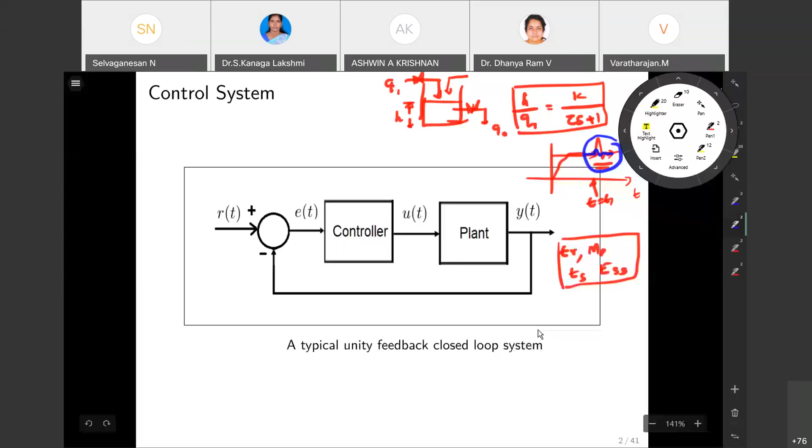Sir, excuse me, sir. Can I interrupt you for a second? Sir, can you please switch on the video? One minute. Okay. I hope you can see my video now, right? Yes, sir, thank you, sir. Okay, thank you. All right.

So the objective of this whole exercise is to design some kind of compensator or controller such that I can meet the desired specifications. My closed loop specifications, as I told you, can be rise time, overshoot, settling time, and steady state error in case of time domain analysis. So finally, after designing the controller, I have to check in simulation whether the required closed loop specifications are met.

Suppose if it doesn't meet the specs, we need to retune the controllers, we need to redesign the controllers, right? Normally, the plant or controller design we do for a given plant is workable for 10 to 15% of uncertainties. Suppose the uncertainties are within this band of 10 to 15%, your closed loop control system will definitely work. Suppose your parameters are varying and it's no longer within the band of 10 to 15%, then maybe you can have other controllers, something like robust control systems, RCS. It is workable for a maximum of maybe 30 to 40% band - I'm talking about uncertainties associated with the plant parameters.

Suppose we say my value of k equal to 1 and tau equal to 2, for example. So the 10 to 15% means plus or minus 10 to 15%. That's what I'm saying. When you talk about robust control system design, it is workable for an uncertainty band of 30 to 40%. Suppose the parameters keep on varying with respect to time t, then definitely your fixed control systems won't work. So we need to have an adaptive control system.

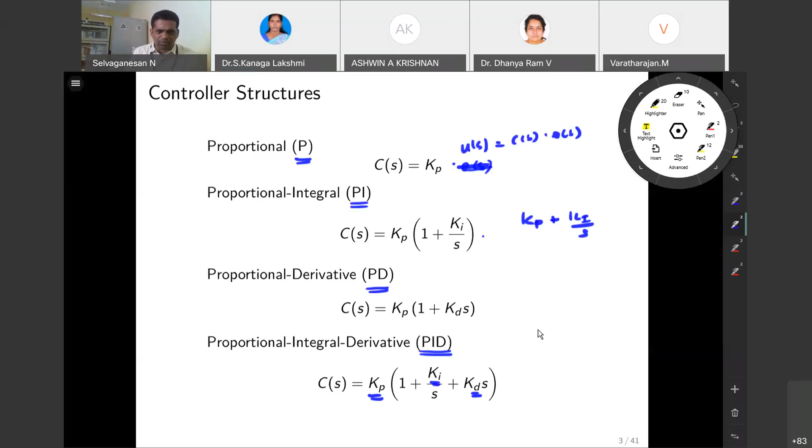So we would like to know first how to select these parameters Kp, Ki, Kd, because we define the structure now for the given control system. We define the structure, but we would like to know how these parameters can be selected. If you look at this table, I have represented it here.

This table shows that with respect to the increasing value of Kp, how different performance indices, time domain performance indices, are affected. As I told you, in case of time domain analysis, we have rise time, overshoot, settling time, steady state error, and we also talk about stability in some cases.

So with respect to the parameter Kp, if you look at this, rise time decreases. So this is decreasing, and overshoot increases because of the decrease in rise time. Normally, as Kp increases, it introduces more overshoot, because a decrease in rise time definitely means overshoot should be more.

But settling time doesn't change much, only a small change may be there, and steady state error is decreasing, but it is not eliminated. Because of the increase in Kp, it actually degrades the stability process. Stability is getting degraded. Now if you look at the parameter Ki, the integral controller...

What happens is, because of Ki, this decreases rise time. So ultimately, like Kp, it increases the overshoot, and settling time increases to a large extent because overshoot increases much. However, the biggest advantage of Ki is that it eliminates the steady state error.

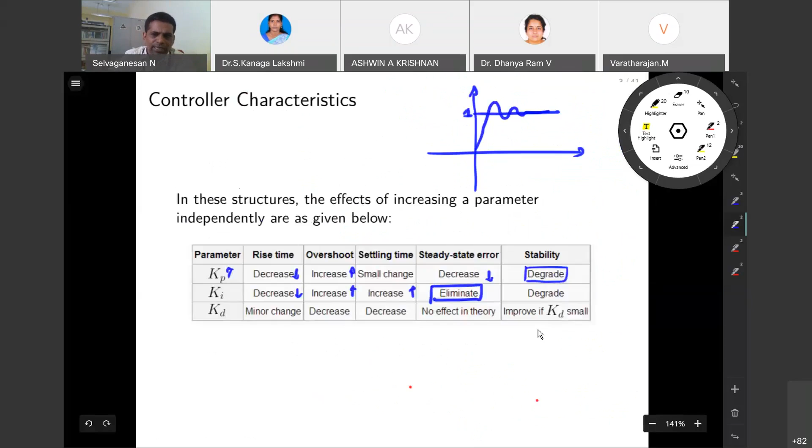This is what I'm saying. If its error is zero, that indicates that your steady state error is eliminated. This is achievable only in case of an integral controller, Ki. But the beauty of Kp is it will reduce the rise time. It will reduce the rise time.

Rise time is reducing, right? Decreasing the rise time, I would like to say. So this is the beauty of that. Ki eliminates this, decreases. Okay, when you look at the Kd, what will happen here?

Kd, there is no much change actually in rise time by introducing Kd, and it will decrease the overshoot. The strength is by decreasing overshoot. What will happen now? Definitely, the settling time will decrease, right? So settling time will decrease, but as far as steady state error is concerned, there is no much effect there. But stability can improve if Kd is very small normally.

That's why if you look at the structure, or if you find that after design, if you look at the parameters of Kp, Kd, normally the numerical value of Kd is very small. That indicates that the stability is improved drastically. So by having an increase in Ki, normally we see more overshoot, and it takes a long time to settle. So these are the characteristics of the controllers which we are talking about.

So now we would like to see how to use that table. I would like to say that the first step is to determine what characteristics need to be improved. That is our first idea, first step. And once it is done, suppose if you say that my open system is working fine, there is no problem at all, right? So we don't go with any control system designs.

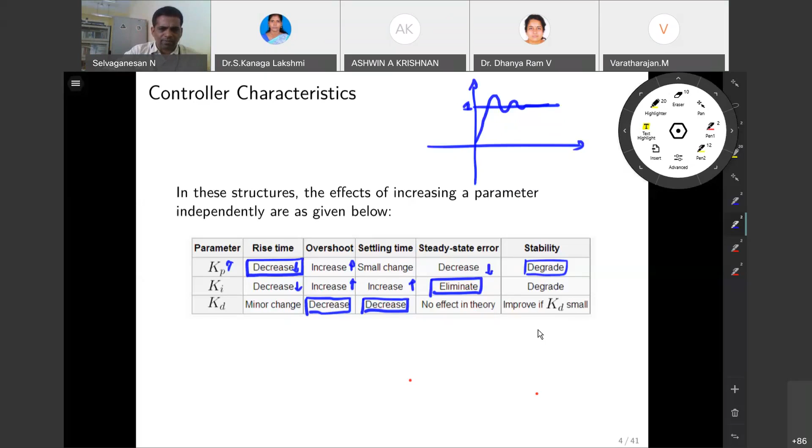So here in this case, we talk about 3 parameter controllers, 3 degree of freedom controllers. One is Kp, Ki, Kd. As I discussed already, Kp decreases the rise time, Ki eliminates the steady state error, and Kd decreases the overshoot and the settling time here. So I hope you can understand the characteristics of the controller parameters with the table.

So as this presentation is concerned, we are talking about 2 different types of design. One is time domain design, and the second one is frequency domain design. I'm going to showcase some aspects of time domain specifications, time domain designs with respect to the given specifications. So if you look at the process industries, they widely use PID controllers, with the specific requirements.

So if you see what are the different methods which are available or well familiar to you, one is the Ziegler-Nichols method. It's a widely used method because if you look at the literature, there are more than 100 tuning methods available with respect to various classes of plants. These are all modifications of the Ziegler-Nichols method, which was invented during the time of 1942.

So there are other methods too, which can be widely used by the process engineers, like Chien-Hrones-Reswick is another method, and Wang-Juang-Chan. These are the few methods I have listed out for how these methods are used for tuning the controllers in the industrial process industries.

Okay, so here we are not going to talk about all the methods because our time is limited. So I'm just going to use a few methods to explain, to make you understand how the controllers are designed or developed. So the first method we talk about is the Ziegler-Nichols method.

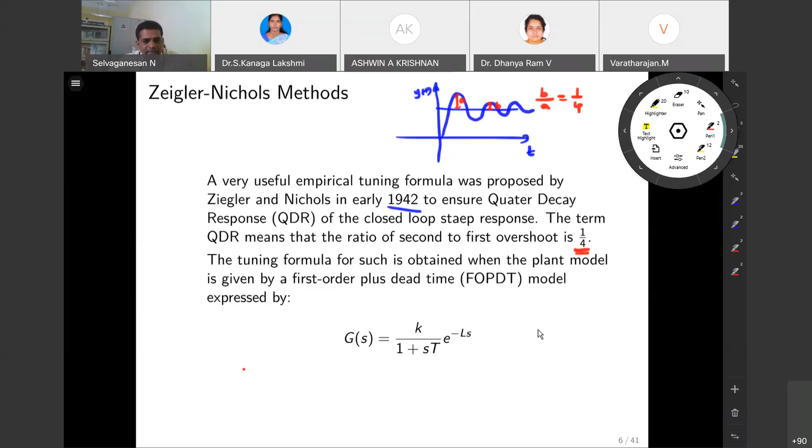So here Ziegler-Nichols is concerned with talking about a first order plant with deadtime. He assumed how a higher order system can be represented with the help of first order dynamics with deadtime. So here k by tau s plus 1, we already have seen this, and he is introducing deadtime, e power minus theta s.

It can be represented in a general sense as k over tau s plus 1 times e power minus theta s, something like that. The parameters here, we use L, which is nothing but theta, and tau is nothing but T here.

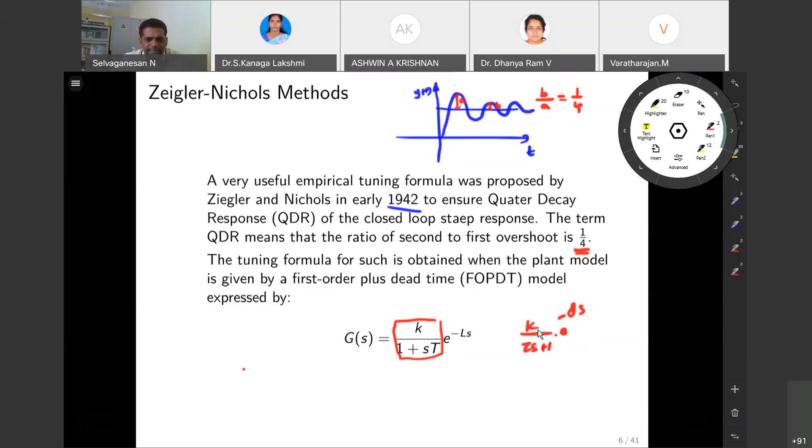Using the Ziegler-Nichols method, we have two methods actually: one is the process reaction curve method, and the second one is the Ziegler-Nichols sustained oscillation method.

In the process reaction curve method, what we do is, given the system, we open the controller and inject a step input, and we get the step output. The controller is open now, we inject the step input and observe the step output, and we would like to see whether the curve is S-shaped. If the curve is S-shaped, then you can apply this reaction curve method.

So here we find the parameters. The first step is to draw the tangent line at the inflection point. So this is my inflection point here, I can draw the tangent line, which cuts the steady state value k, and this point, where it cuts the time scale, is nothing but t, the time constant.

The remaining band is nothing but theta, or as we are saying here, L. So we know the steady state information is k, and the time constant information is t.

And the dead time information we also know from the experimental response, L. Based on this information, one can find the respective parameters. For example, suppose I want to find the parameter using just a P controller. The P controller constant Kp can be obtained by 1 by A, where A is K multiplied by L divided by T. These informations are available from the experimental example.

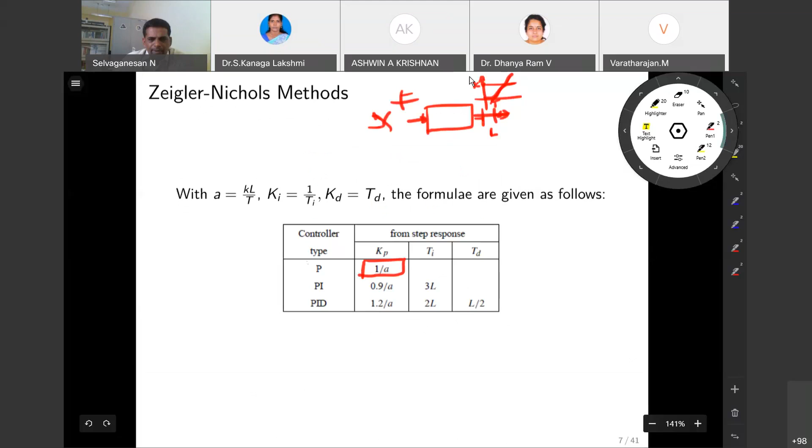So what they did, suppose in case of P controller, this is my P controller here. My P controller is computed based on 1 by A, where A is K L by T. Using this formula, I can find my P, so this is my proportional controller Kp. Like that, in case of PI controller, I can find Kp and this is Ki. I can find those parameters based on the formula which is given.

So it is something like a lookup table. By conducting the experiment, you observe those parameters, and based on them, one can find what the controller parameters are, based on the structures which we selected. There are 3 structures defined here: one is P structure, then PI and PID.

On the other hand, you have the Ziegler-Nichols sustained method, the sustained method of oscillation. Normally what we do now, I have a closed-loop system, and I keep the controller gain. Maybe I have a plant here, my plant is given, and my controller is here, I'm keeping only gain. With the help of gain, I can adjust it, start the gain, increase the gain, and make the system provide sustained oscillations.

It means by increasing the gain, after some time, what will happen? In case of root locus, suppose there are some poles here, and by increasing the value of K, they move towards the right hand side of the plane. I'm considering the case where the poles are moving to the right hand side of this plane for a certain value of gain K. That gain we normally call critical gain, and the frequency we call critical frequency.

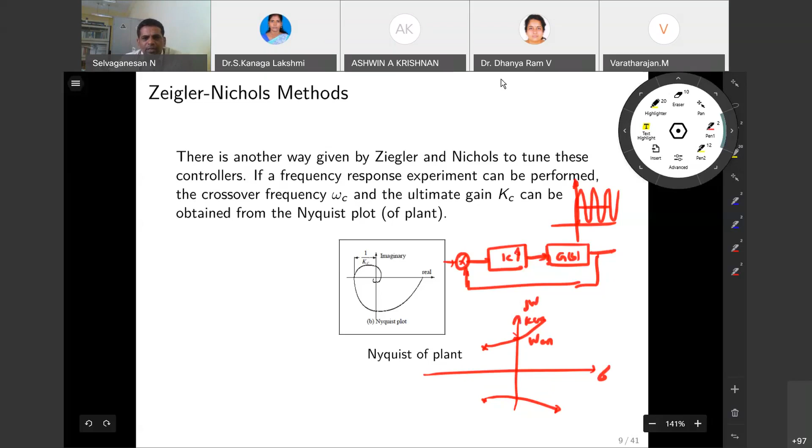So this gain, based on the gain and frequency, one can find the parameters. For example, the critical gain is Kc here, and he has defined a tabular column like what we saw in the previous method, method 1. So I can find 0.5 times Kc becomes Kp, and 0.4 times Kc and 0.8 times Tc becomes the PI controller Kp and Ki parameters. And in case of PID, we define 0.6 times Kc, 0.5 times Tc, and 0.12 times Tc, where Tc is 2 pi by omega c.

So if you know the information of critical gain and the ultimate frequency, one can find the parameters of the controller using this table. So this is also some kind of lookup table only.

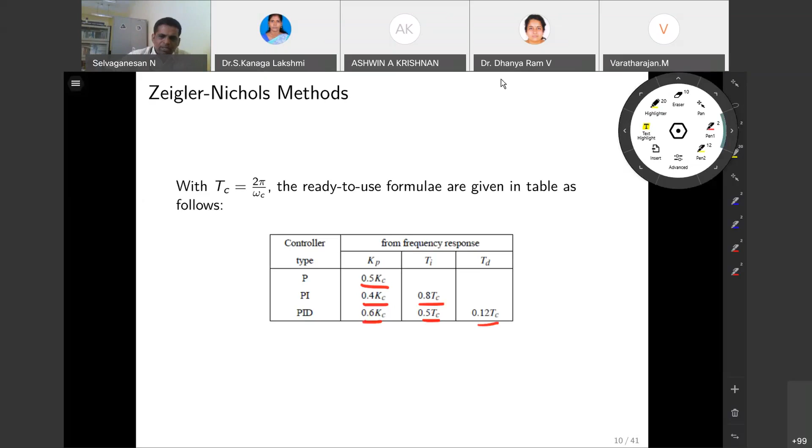But you might ask, does it provide the optimal solution or not? Definitely, some cases may provide it, some cases may not. So we need to do some further tuning. Initial values of those parameters for the given plant can be obtained with the help of this, and later, if you are not satisfied with the given characteristics, one can fine tune with the help of other methods. We are not going for that now, and we are going to explain how these parameters are tuned actually.

Okay, now let us talk about the prospective equations, how to find the value of Kp analytically. So here I'm considering a simple P controller design, assuming we have taken a servo system.

Simple motor control system where the dynamics of the motor can be represented by Km divided by S times tau m S plus 1, where Km is the feedback motor gain and Tm is the mechanical time constant. Here the electrical time constant is neglected. Normally it comes in the form tau E S plus 1 and tau m S plus 1.

This is the motor control, simple armature control speed control of a machine that provides dynamics in this form, Y to V. But this is nothing but theta with respect to the voltage applied to the armature, VA. This is my dynamics. Normally the electrical time constant is very small compared to the mechanical time constant.

Under this condition, the servo system is finally defined as a simple second order dynamics. So we reduce it to Km divided by S times tau m S plus 1. Since the mechanical time constant is large compared to the electrical time constant, we neglect it, so we have only second order dynamics.

Suppose we want to design a controller, for example a P controller, as defined here. I want to design a P controller - how to do that? So here this is my G and this is my GC. What do you do now? I want to find the relation between Y and R.

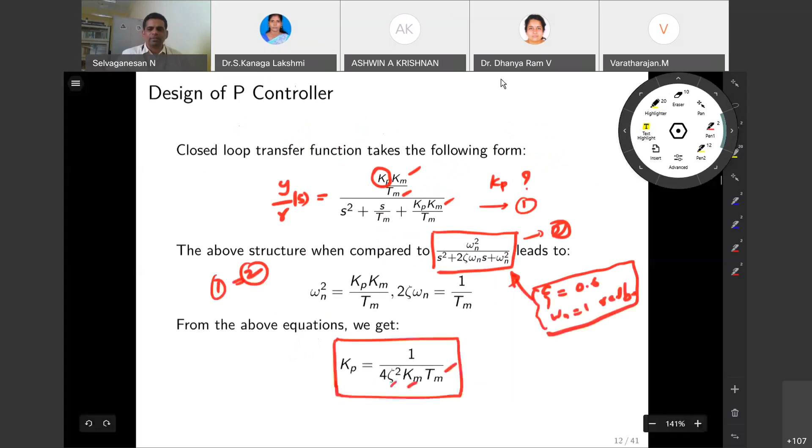So I obtained the value of Kp, which is something like 1.0204. Now I am substituting this in the feedback system, replacing the value with that computed Kp.

Then we applied the simulations. After simulations, this is the course of simulation with respect to the given step input command. The magnitude of the step input is given as 1, a unit step input. So we are looking at how the response is, whether it meets the given specifications or not.

Now the specification is that overshoot is 4.6, as given here. We would like to see after simulation, if you see this overshoot, I've placed that point here. If you look at this now, exactly the overshoot is 4.6, so there is no ambiguity actually.

The point I'm saying is when you look at the analytical models, the specification to be met for the given closed loop is overshoot only. So a one degree of freedom controller is sufficient to maintain the overshoot of 4.6%. After doing the analytical expression, I found the parameter Kp and substituted it in the simulation, and found that it reaches exactly 4.6.

Other parameters are not in our control because we are not adding them as a specification for the design of the Kp controller, since it is basically a single degree of freedom controller. One degree of freedom is only Kp. Two degrees of freedom would be either Kp, Ki or Kp, Kd. Three degrees of freedom control would be Kp, Ki, Kd - three parameters. We are talking about a single parameter controller.

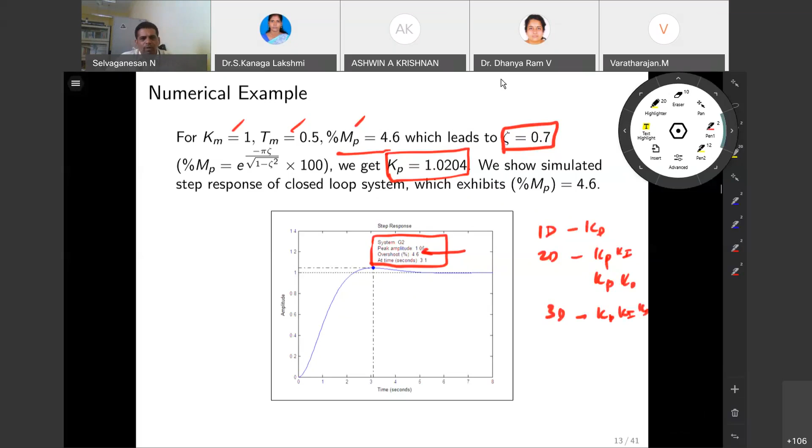A single parameter controller can meet only one solution, because mathematically it's one equation, one unknown. So it provides a unique solution. That's what we observed from the response - that it exactly meets the specification given to the closed loop simulation, which is 4.6% overshoot.

Suppose you want to design other controllers, the same way we can develop them too. I've considered another example to help understand the analytical way of deriving the controller - the PD controller. I'm using the same approach here. The structure is given as PD: Kp times 1 plus Kd times S.

This is considered here, and you derive the closed loop dynamics, that is Y of S to R of S. You find this and equate it with the standard second order equation, so you can find the parameters of Kp and Kd.

So, what is given here - actually, we are talking about...

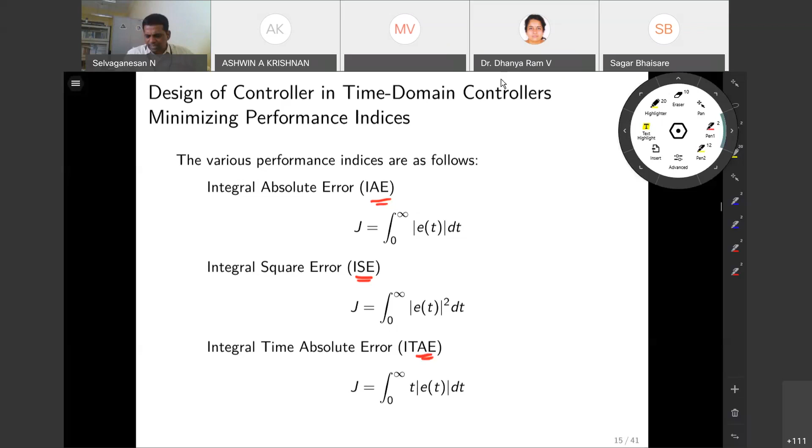These are the performance indices we normally define like this. Now, when to use ISE, IAE, or ITAE - we normally see, if you have a large error, it normally contributes during the transient period only. We normally use ISE, integral square error, rather than IAE, because ISE is significant in case of a large error, but it always provides good accuracy in case of lower errors. So during the transient period, where larger errors occur, we use ISE for the controllers.

That is one aspect of looking at the problem. At the same time, I would like to say ISE actually provides a larger settling time, so that increases the settling time. This is because when you look at the error as time approaches infinity, if the error is minimum, what is the square of that error? Suppose we have an error of 0.1 at steady state, the square of error becomes 0.01, which is less significant compared to integral absolute error. That is why, to get better transient behavior, use ISE, and for better steady state behavior or better steady state profiles, we normally use integral absolute error minimization controllers.

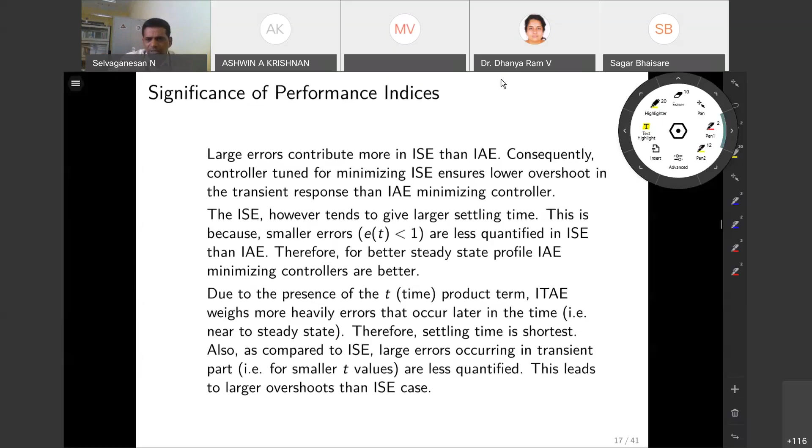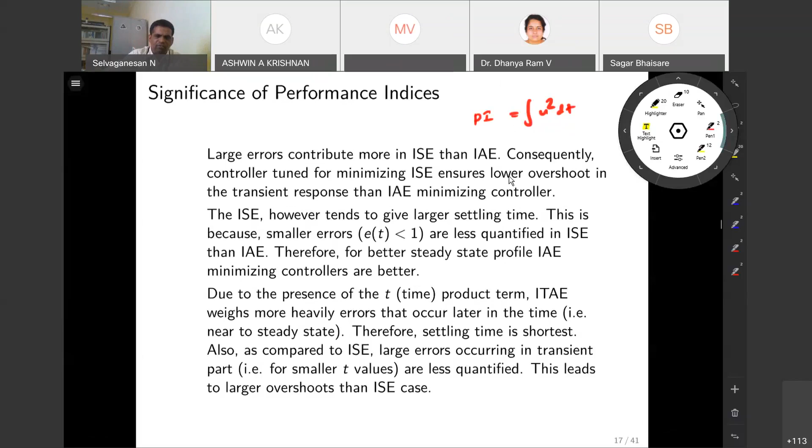But these are the standard performance indexes used by many researchers for tuning controllers using optimization methods.

When you talk about how these controller parameters can be obtained by minimizing this, we need optimization. Normally we use the simplex method, dynamic programming, and many other methods for minimizing such problems. Here I am using a simple function available in MATLAB, that is fmin search.

I have given the code here for fmin search. There are two functions available: one is the function to be minimized, the search we are talking about, and another is fmin con. This is required only for constrained optimization.

Suppose with respect to the given performance index, in addition to it, I need to minimize certain things, so we have certain constraints, which can be equality or inequality constraints on the minimizing function. So with certain equality or inequality constraints, we use fmin con.

But here we are talking about fmin search because it's a very simple unconstrained optimization, since we only need to decrease the error or maybe usability or whatever. We can use this function and run it. This basically works on the model of the Nelder-Mead approach, spelled N-E-L-D-E-R. This algorithm is used for optimization, somewhat like a gradient descent method.

And the third one, with respect to the ITAE, I have obtained the control parameters KP, KI, KD. So I'm using a simple PID structure, and I'm trying to find the parameters KP, KI, KD with respect to different performance indexes. The first performance index is IAE, the second is ISE, and the third is ITAE.

So I have obtained the response with respect to ISE as something like this. If you look at this, it takes a long time to settle. If you look at this problem, it still further takes time, right?

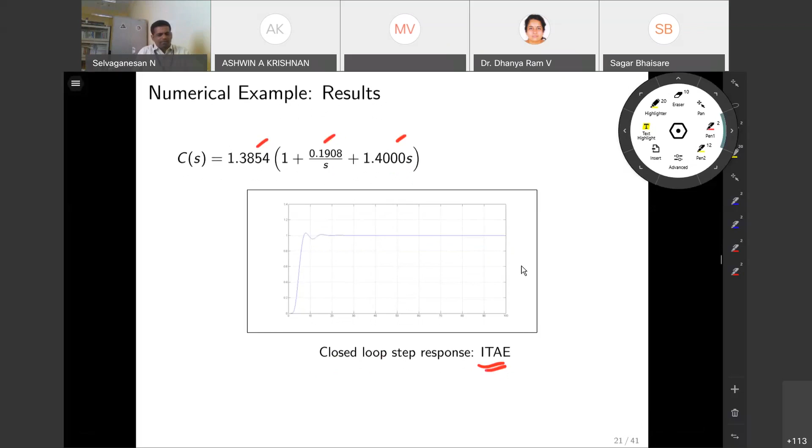So ISE normally introduces more settling time, whereas IAE normally has less settling time. So when you want less settling time with some trade-off, ITAE normally provides a kind of trade-off between the transient behavior and steady-state behavior, and it works very well for controlling the steady-state characteristics.

So this works. You see that it settles very fast, and the overshoot is also very limited. Actually it is even less than 1.1 here. And in case of ITAE, you can see that it is well controlled, to some extent. I would like to say that for this process it works well.

It doesn't mean that it works well for all processes. Suppose I'm using complete certainty, everything is constant, so there are no variations introduced in the plant parameters, and no disturbance conditions are simulated either. Just to showcase you, I have simulated this using MATLAB and am showing you some response for your understanding.

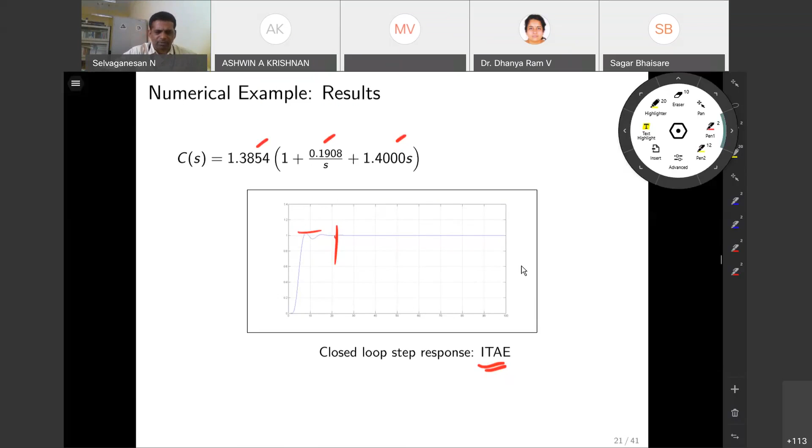You have seen other methods. Other methods are maybe graphical tools, like the root locus method. This is in the S domain, used for the design of controllers, and by placing the controller poles, one can find the root locus such that I can say whether my specifications are met. So this is another graphical tool for design of controllers, but we are not going to discuss it here.

So let us move on to the frequency domain. What we learned so far is time domain analysis and frequency domain analysis. In case of time domain analysis, we talked about analytical expressions and how they can be useful, but only for the design of controllers using those analytical expressions.

If that provides you a unique solution, that is an advantage. At the same time, the disadvantage is we are always trying to equate with the standard second order dynamics to get the parameters. So this is one limitation here.

And in some cases, we say an apple cannot be compared with an orange. Suppose the dynamics of your plant is of fourth order, how can you compare it with second order dynamics? Yes, it can be done only by reducing your final plant dynamics of fourth order to second order, and then comparing it with the defined second order dynamics.

So this is one way we learned, and we also learned some generic methods like the Ziegler-Nichols tuning method 1 and method 2, the reaction curve method, and we also learned the sustained oscillation technique for minimizing this.

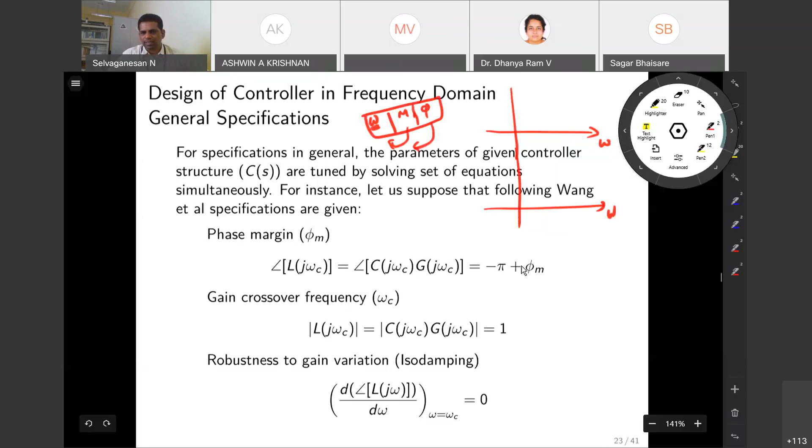So with respect to omega, we give a sinusoidal input and get a sinusoidal output. Under this condition, I can vary the frequency to get the magnitude and phase information at different input frequencies. So I can draw two plots in a Bode plot: magnitude versus frequency, and phase versus frequency. These are two plots, and we call this the Bode plot or Fourier plot.

We can combine these two things with the help of Nyquist also, but we are not talking about that here. We are talking about the simple Bode plot, which contains two plots: the magnitude plot and the phase plot.

From the magnitude plot, suppose the magnitude plot looks something like this. The magnitude crosses the 0 dB line, this is my 0 dB line, and that indicates omega. So this is the gain crossover frequency, that is omega C.

Here is the gain crossover frequency. So I also have a phase plot, something like this. With respect to the gain crossover frequency, I can measure what my phase is. This is nothing but the phase.

So we are talking about frequency domain controlled system design, where the specifications are frequency domain specifications like gain crossover frequency. I have defined gain crossover frequency as where the gain crosses the 0 dB line. That is your gain crossover frequency, and the phase margin is here, this is my phase margin.

These two are known to us because we learned from basic control theory about gain margin, phase margin, gain crossover frequency, and phase crossover frequency. These are the four parameters we learned. For the design here, we are using gain crossover frequency and phase margin. With respect to the gain crossover frequency, we measure the phase margin. So these two will be treated as specifications for the given control system design.

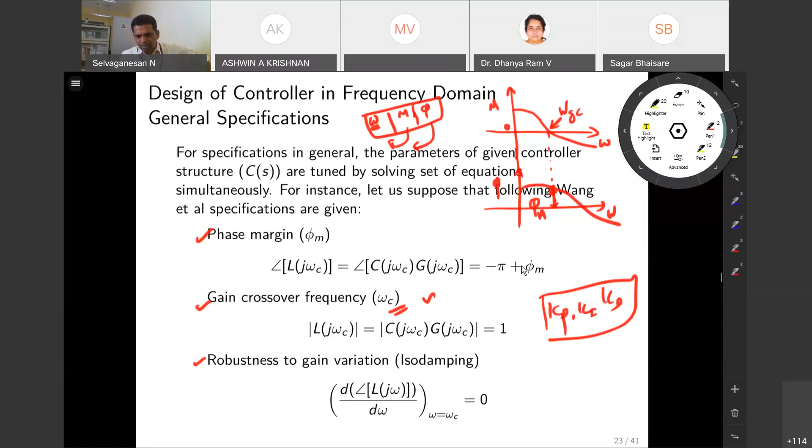Most fractional control designs, which you learned in the previous session about how fractional controllers can be developed or designed, normally use many specifications. This is one of the specifications used for design purposes. We call this iso-damping. What do you mean by that?

So it means, for example, we are talking about the Bode plot here, specifically the phase plot. My phase plot is like this. So what is happening now? We are talking about robustness to gain variation. What do you mean by gain variation?

Suppose for a given k, my omega GC is crossing at this point. Suppose I change the gain k, increasing it. What happens? By increasing gain k, your Bode plot gets shifted up. By decreasing gain k, it gets shifted down. So either it will go up or down, depending on the gain value.

So this is the point I'm saying: increasing or decreasing the gain shifts the magnitude plot, and by shifting this magnitude plot, your gain will change depending on whether you increase or decrease the value of gain k.

Suppose in this plot, by increasing gain k, it shifts here, so my phase margin gets reduced. If you increase it, the phase margin changes, maybe high or sometimes low, depending on the response time. So there is a change in response, there is a change in phase margin.

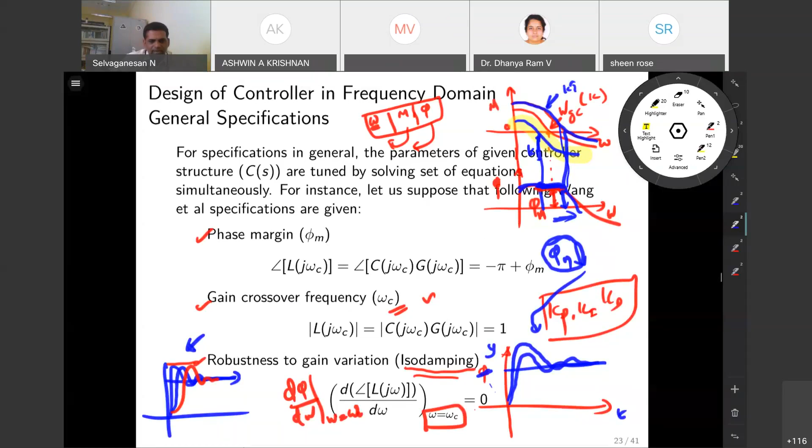So using these parameters, Kp, Ki, Kd, one can find the corresponding controller parameters. Kp as here, Ki, maybe a little complex derived expression, but at the end you get the solution. Kp is here, Ki here, Kd here. So finally it becomes 3 equations for 3 unknowns. What are the 3 unknowns taken? 3 specifications: phase margin, gain crossover frequency, and robustness towards gain variation. These 3 are the specifications considered.

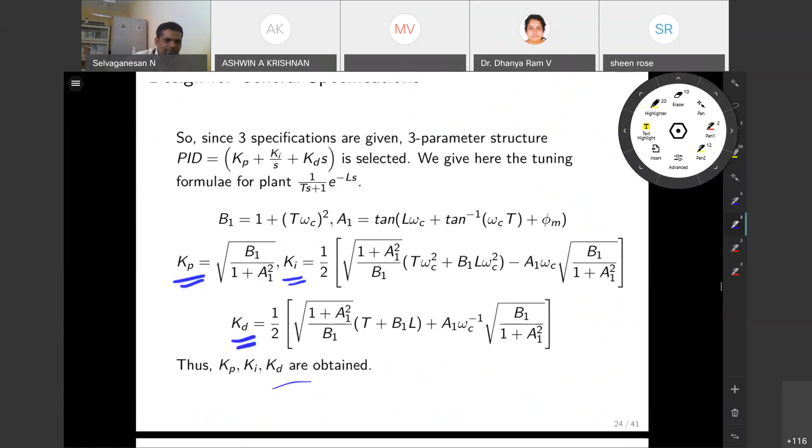Under this condition, we are not using any optimization method here, since the number of specifications and number of parameters available in the controller are equal, 3 numbers. So I am directly solving the expressions analytically and finding the parameters Kp, Ki, Kd. This is the way we normally obtain these parameters.

Let us consider, just to demonstrate, the controller in the frequency domain. We are using T as this, with dead time L as 0.01 seconds, and time constant 0.4. Omega GC is given as 10, and phase margin is 50. This is what my closed loop specifications are, along with d phi by d omega at omega c.

So 3 specifications, 3 unknowns. Using the previous formula for Kp, Ki, Kd with the known parameters, I can find Kp as 2.7425, Ki as 25.7861, and Kd as minus 0.0500.

So by substituting this controller, what will happen? You can draw the model. So I have a G here, I have a GC here, right?

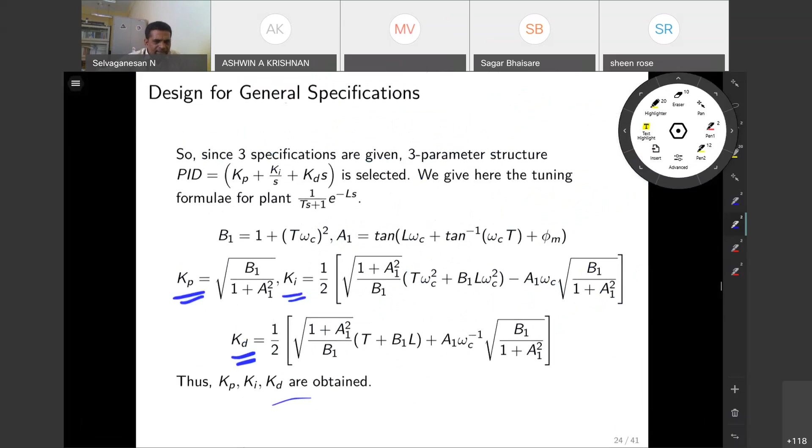Let us quickly see how this control system design is performed. So for what we talked about, we are talking about the controller plant, and we are designing the controller for the given specifications: gain crossover frequency omega c, phase margin, and the isodamping condition. With respect to that, we are seeing whether that closed loop design can meet the same specification or not. So it met.

So we learned that. Now we will go with some general specifications, how the control system design can be developed in the frequency domain with some general specifications. So let's look at this now.

So for example, we are saying one can design a two-parameter controller. Say, for example, I want to design a PD controller to meet the specification, say phase margin, and you can analytically derive the formula for selecting the structure. That is what normally we do. Suppose if you have two specifications, I want to develop a PI controller, I can do it. Suppose I have three specifications, with three different controller parameters like PID, I can meet the specification with an analytical structure.

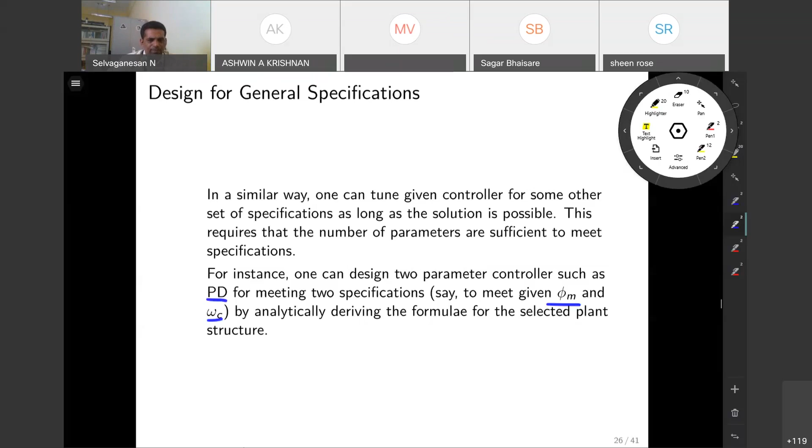Now we'd like to understand how these frequency domain characteristics are getting altered with respect to the given design. Let us first see the proportional controller, and we'd like to see three things: proportional, PI (proportional plus integral), and PD controller.

The first case is a proportional controller. By using a proportional controller, only gain is added. So it is something like K by tau s plus 1. This is the process multiplied with a simple gain. So gain multiplies gain. What will happen now? The magnitude plot either can go up or down.

However, there is no effect on the phase. There are two plots we talk about in the frequency domain: magnitude plot and phase plot. By adding a gain, either it will shift upward or downward in the magnitude response. However, the phase response has no effect, because the phase is independent of the magnitude.

So the ability of the gain is to change the magnitude only, but have no effect on phase, exploiting the design of the controller that is modified. This is the conclusion with respect to a simple P controller. So by adding a P controller.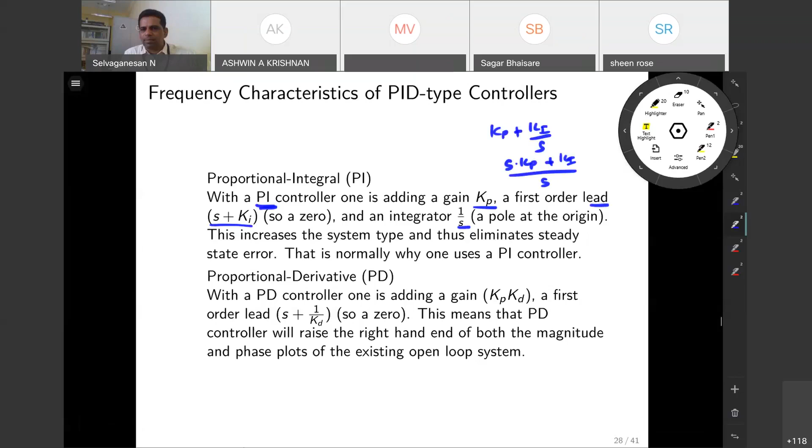By adding a PI controller: this controller indicates KP. So you have a PI controller, and it is adding a gain KP. This is what we are saying. KP is added here. So what is happening? The first order lead, you have S plus KI, so there is a zero and an integrator. It normally looks like KP, simply written as KP plus KI plus something, a parallel structure: KP plus KI divided by S. So S times KP plus KI divided by S. This can be simplified as S plus KI by KP, something like this.

So that is normally why one uses a PI controller. When you want a system that inherently has a steady state error, one can use a PI controller such that you are able to eliminate the steady state error, or you can say the steady state error is zero. This is what we normally do in case of a PI controller.

In case of PD controller, we look at it the same way. PD controller: KP plus KD times S, something like this. So we write some simple formulas: a first order lead, S plus 1 by KD. It is only one zero, there is no pole, only a zero is available. This means you have a PD controller.

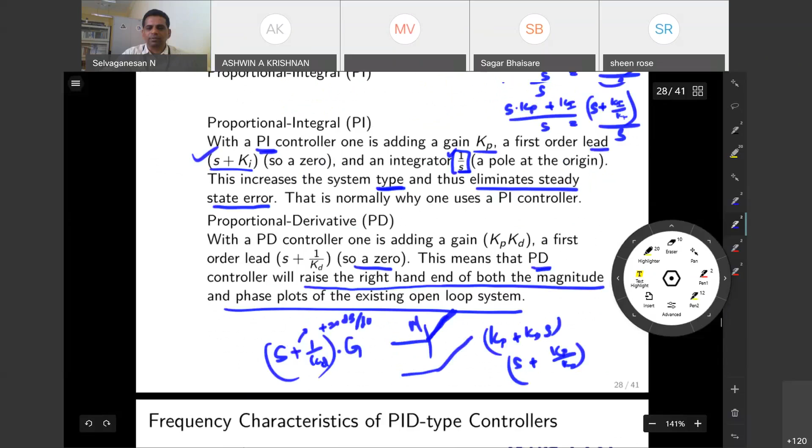So it has what actually, 2 zeros. Like I said, as the previous case, S plus Ki. So I like to say S plus Ki by S, this is the PI. Then S plus... we say the 1 by Kd is given, right? We say 1 by something. So it means I have 2 zeros.

This is my first zero and this is my second zero, and I have one pole which is attached, that is integrator, right? That is what we are defining. Suppose if you look at this, if zeros are real, the controller is actually a combination of PI and PD. Whatever we learn here, this structure multiplied with this is nothing but a simple PID controller. When we talk about the zeros are real.

Okay, so what will happen now? The pole at the origin, what will happen? It will increase the type by 1 and hence it eliminates the steady state error. That is what it does actually in PID controller.

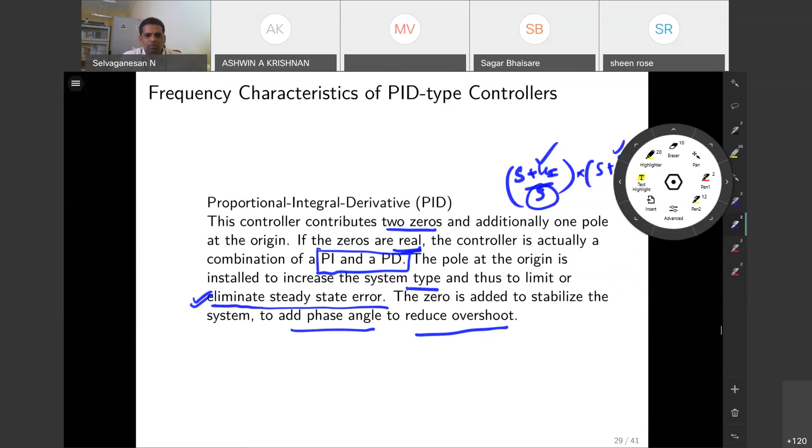And second point is the zero is added to stabilize the system, right? The 2 zeros are here, it stabilizes the system, and also adds phase angle to reduce the overshoot. This is the basic characteristic when we talk about PID controller in frequency domain. So that's the reason how overshoot and things are controlled, because of adding a phase, it reduces the overshoot.

Let us see graphically how this is enhanced.

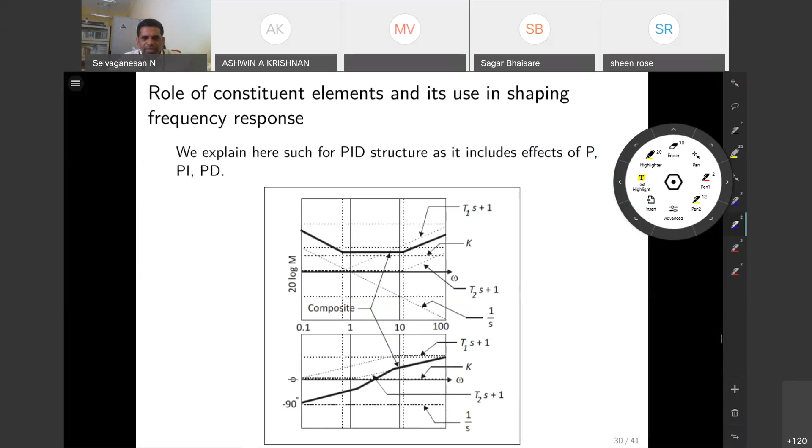So I would like to say here you have a K, right? I'm writing it tau 1 s plus 1, tau 2 s plus 1 divided by, I'm writing in general form. This diagram is I have taken from the Massachusetts Institute of Technology courseware. So K times tau 1 s plus 1, tau 2 s plus 1. This structure is coming from PID structure, so this is the combination.

This is coming from PI, and this is coming from PD. And the combination I'm writing as K times tau 1 s plus 1, tau 2 s plus 1, by S. There are 2 zeros and 1 pole which is at the origin. Now we are going to plot the magnitude and phase actually.

So you just take first K, you can draw some line here, right? This is my K here. So second one is what actually? This is my dotted line, I'm talking about this dotted line, right? That is nothing but K, some K I can be able to draw this.

And second one is I'm plotting the integrator. What is the integrator? Integrator is minus 20 dB per decade. So I have drawn that minus 20 dB per decade line.

And third one is tau 1 s plus 1. So till the first tau 1 s plus 1, till this point, this is my tau 1 here, right? This is my tau 1, first corner frequency. This is zero, so it takes up. So I like to draw here, it comes here, after tau 1 it takes up, plus 20 dB per decade. Hope we can follow it.

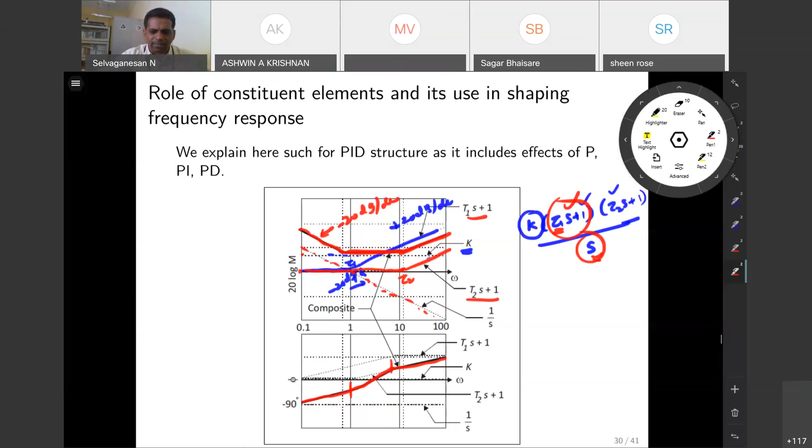So far, you've always learned about the plant and how the plant characteristics can be seen from the Bode plot, magnitude and phase plot, step response, followed by stability analysis, etc. But here I have taught you how the PID controller itself can be seen and its characteristics understood in the frequency domain. So this is what I expressed here, please go through that.

Whatever I explained, it is there. Okay, I will go to the example now, just 5 minutes to complete it. We will take an example of simple plant dynamics: 1 by s times s plus 4 times s plus 6. It is desired to design a controller.

This is the problem statement I had given, such that the closed loop dynamics should meet peak overshoot less than 10%, and settling time less than 1.2 seconds. So we need to use our SISO tool keeping in mind the properties of the PID control structure.

But what I need now is to achieve the required overshoot and settling time. So I need to run a time domain simulation, since whatever I get in the frequency domain here, I need to verify in time domain, to check whether I can meet the given specification on overshoot.

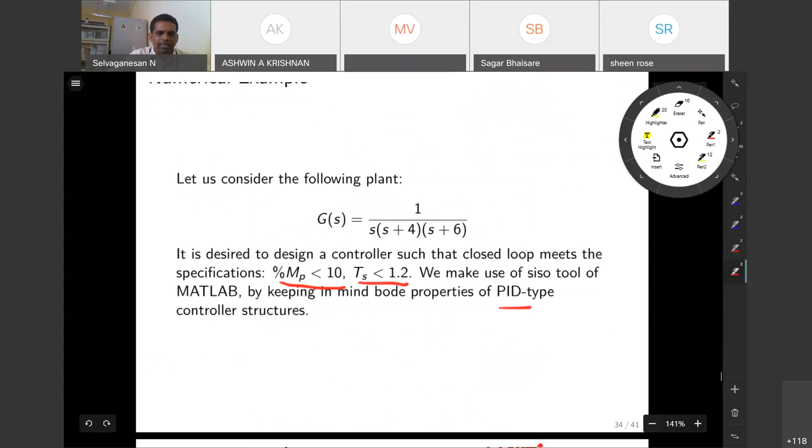If go up means what actually? We need to increase the value of K. So for the uncompensated magnitude plot, to increase the gain crossover frequency, which in turn increases the closed loop bandwidth.

So increasing the closed loop bandwidth, what will happen? There is an inversely proportional effect, so it will reduce the rise time. This is possible by using simple open loop gain. By increasing the open loop gain, the Bode plot gets shifted, the magnitude plot gets shifted.

But what will happen now? Due to mere increase in such gain, peak overshoot occurs because it reduces the rise time. Reducing rise time normally introduces peak overshoot, right? So what do you need to do now? I need to add one zero.

So then what kind of control do we need? I need to have a PD control.

So you got it, no? You got to see the open loop characteristics and time domain characteristics also. And from the open loop frequency characteristics, you would like to see what other things need to be improved.

So I'm saying that first I can introduce the gain such that I can shift the magnitude plot so that I can get the required bandwidth. But at the same time, the increase in bandwidth actually reduces the rise time, and that introduces peak overshoot. So to reduce the peak overshoot further, I'm using a simple zero with appropriate location to increase the phase margin. This will reduce the overshoot.

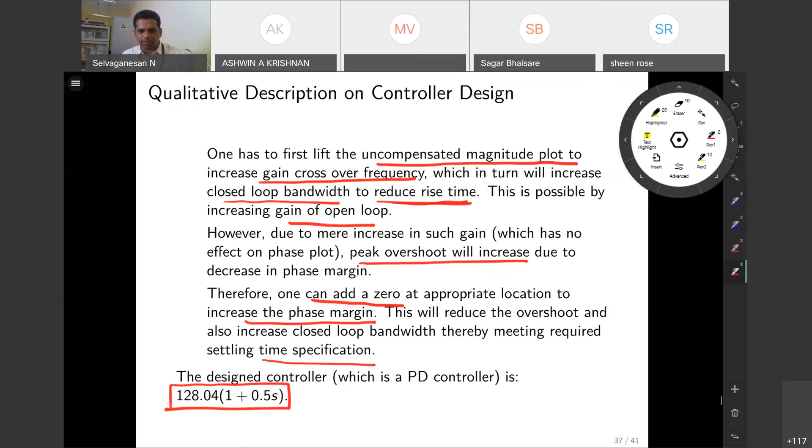Finally, the controller I obtained based on this procedure is a PD controller with parameter KP equal to 128.04 and Ki is 0.5. Sorry, D control is 0.5. So after doing this, I redo the simulation.

So my magnitude plot is here. If you look at this, gain margin is infinity here, frequency is also infinity, and it is a stable loop. And when you look at the phase margin, 57.4, at that frequency of 6.46. So this is what I have obtained from the Bode magnitude phase plot.

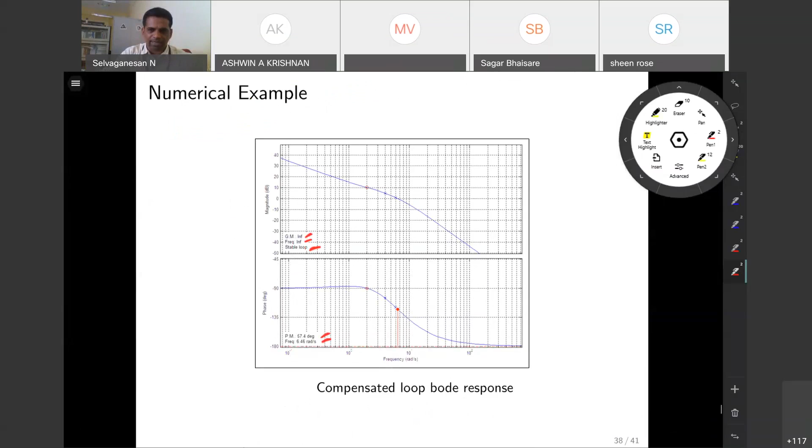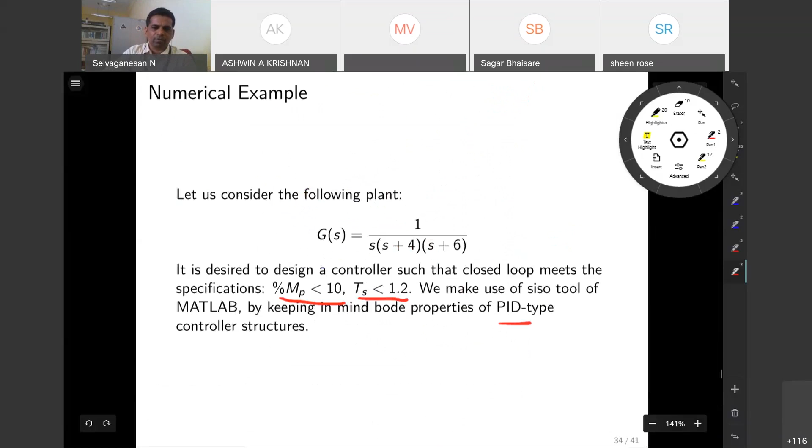So these are the ways we normally do control system design. I always like to suggest that you always draw open loop characteristics and see what characteristics need to be improved, and based on the requirement, one can develop whether PI control is required or PD control is required. Because every control parameter has its own characteristics. So how these characteristics can be enhanced in frequency domain analysis, we have seen. You have to carefully do that such that one can get the required specification at some point.

So this presentation is actually written based on two books - Gopal's Digital Control and State Variable Methods, and the second one is chapter 8 of the Control System Engineering book. So these two books are the reference for developing this theory. With this I would like to stop my lecture. If you have any questions, I will take them.

So there's one question in the chat box. Shall I read out the question? Yes, please go ahead because I am not able to see it.

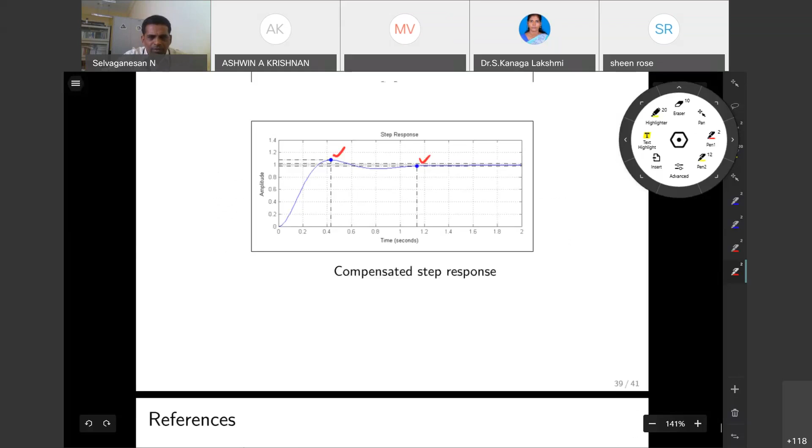The question is from Mr. Tirumurthy M, and it says, how do you guess 1 degree of freedom is enough for a percentage overshoot of 4.6? So we're talking about a simple P controller, right?

I'm just going back to what was discussed. This is the controller we talked about, right? So here we are saying that this is the question as asked: a 1 degree of freedom controller. 1 degree of freedom means it can be a KP, KI, or KD, and KI and KD cannot work independently. Only KP can work independently compared to other parameters. So definitely it works well because it's basically an analytical proof we are showing here.

So we are comparing the standard second order dynamics and finding what is making it. My specification is given as overshoot - that's the only specification given, and it cannot be given directly; it can be given in the form of zeta. Once you know the value of zeta, I can compute KP such that I can meet it. Yes, it is possible, it is done. I'm stressing the point again: overshoot can be minimized with the help of simple proportional control itself. This is the evidence.

So the next question is from Mr. Sandeep, and it says, can we use this method for an unstable system as well? I'm sure it can be used for an unstable system also. Yes, I'm considering a simple case to make it understandable.

Mostly we work on unstable processes only, for example magnetic levitation process or an inverted pendulum process. These are all open unstable processes. So definitely one can develop a controller for such conditions using time domain analysis or frequency domain analysis. That's why I told you whatever we are talking about is minimum phase and stable systems. There are other systems too: non-minimal phase system is another category, and unstable systems are another category. Most practical systems come as unstable systems, and sometimes non-minimal systems. Design of controllers for such conditions is a little complex compared to stable models, but there are methods for doing that. Out of the few methods I explained, these are also applicable for unstable models. Even in some conditions, some methods can be useful for non-minimal phase models as well.

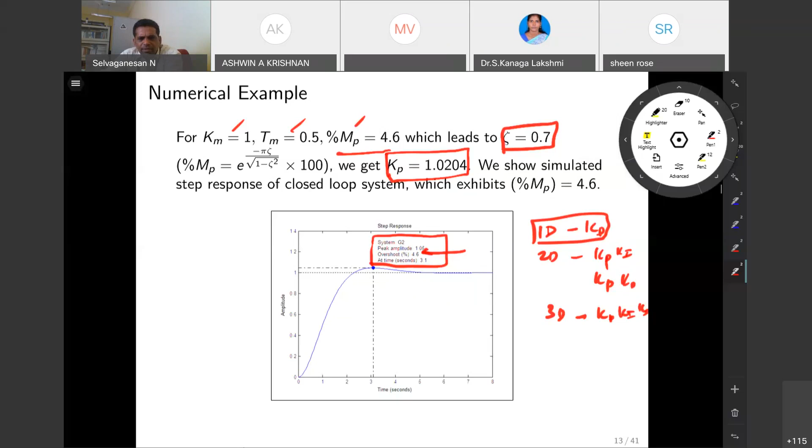Zeta you are talking about? Yes, sir. This actually comes from whatever we are talking about, the second order dynamics, right? This comes from...

For example, in case of second order dynamics, what will happen? I have not run a standard second order characteristic here, so it will be like this. I have a different characteristic with respect to zeta. Suppose if zeta is 0, what will happen?

It means I have a pole lying on the imaginary axis. So when zeta is 0, the poles are at the imaginary axis, and that introduces sustained oscillations. Instead of a normal response, I have a response which is oscillating, with respect to zeta equal to 0. So it's a sustained oscillation, it provides you the sustained oscillation.

Suppose by increasing the value of zeta, what happens now? There are two poles here, so two locuses - one will move like this, and another will move like this. We have measured this variation as zeta varying from 0 to 1. When zeta is varying from 0 to 1, poles move toward the left hand side, like an arc type. When zeta is at 1, both poles are in the same place.

Shall we start the session? Yeah, it is already 11:30. Yes, so I will start my session. Sir, before that, we will give welcome and introduction. Yeah sure, sure, thank you. So I invite Dhanya ma'am to welcome you, sir.

Good morning, sir. I am extremely delighted to invite you for our online FDP. The topic of Dr. Malladi today will be the steady state analysis of a 2x2 control structure for the FCC unit. So let me first introduce Dr. Malladi. Professor Malladi is presently working as Assistant Professor in the Department of Chemical Engineering, NIT Calicut. Dr. Malladi received his BTech degree from Osmania University, Hyderabad. He did his MTech and PhD from the Indian Institute of Technology, Kanpur. After that, he joined the Max Planck Institute for Dynamics of Complex Technical Systems, Germany, for his postdoctoral fellowship.

Next I will tell you one quotation by J.R.D. Tata. This is a very important quotation which I liked very much, and I want to share with you. You can read this: 'No institute of science and technology can guarantee discoveries or inventions, and we cannot plan or command a work of genius at will.' This is an important observation from an eminent industrialist, J.R.D. Tata, who was conferred the Bharat Ratna Award in 1992.

Now I will continue this: do we give sufficient thought to the nurture of the young investigator, to providing the right atmosphere and conditions of work and full opportunity for development? It is these things that foster invention and discovery. So we are all teachers, working in various institutions.

So the duty of teachers - I have shown one more picture here. This person is Venkataraman Ramakrishnan. He was conferred Nobel Prize. Once he gave a lecture in Indian Institute of Science. One student asked him how to get the Nobel Prize. Venkataraman Ramakrishnan replied that you will not get the Nobel Prize, please sit. That's it. So that is the answer.

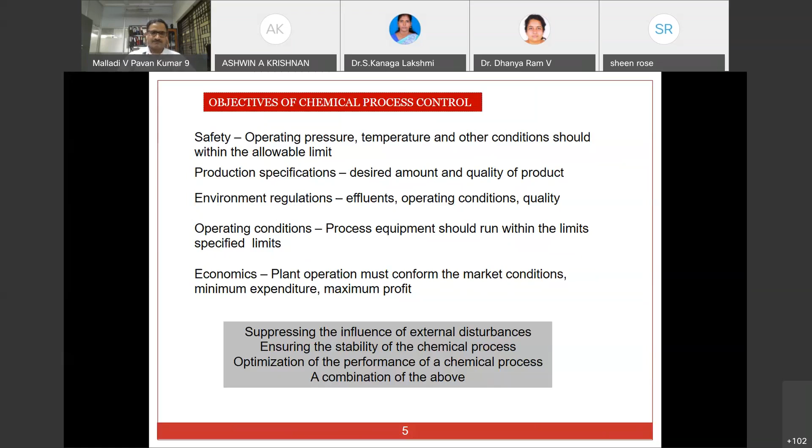So when we see a process, we consider the process with which we want to design a control strategy - that is called a system or process. For the process system to devise control strategies, first we have to understand the process very well.

We have to see what are the input variables, what are the output variables of the process, and what are the potential disturbances. We have manipulated variables which can be manipulated - these come under input variables. All manipulated variables are input variables, but not all input variables are manipulated variables.

So manipulated variables are a subset of input variables, and not vice versa. Similarly, controlled variables are a subset of all output variables. Some input variables and some output variables we will not be in a position to measure - so we have measured variables and unmeasured variables. Then we have disturbances.

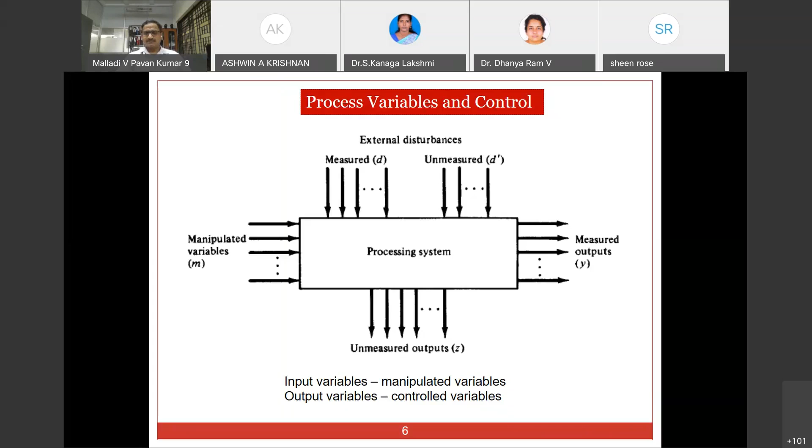In the case of control, we have to understand all the subjects. Each control problem is unique. Electrical engineering people have different control problems, and chemical engineering people have a different type of control problems, because chemical systems differ from electrical systems. Mechanical systems have a different problem too.

But the tools that we use are almost the same. So in this way, control engineering is something unique, which is why many institutions have control engineering as a special discipline.

When we see the difference between modeling, simulation and control: in the case of modeling, we will know the input and output, but we do not know what is the relationship between input and output. Sometimes it is possible to come up with first principle modeling, where we take material balance and energy balance in chemical engineering systems, and come up with models - unsteady state models, those differential equations.

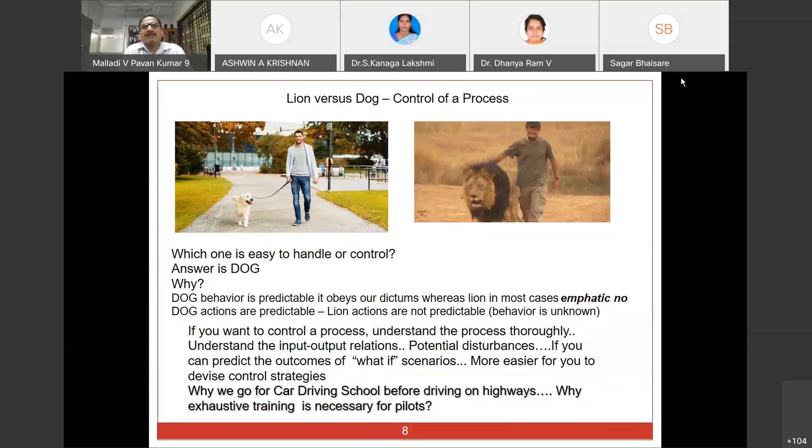Similarly, if you want to control the process, first you have to understand the process very well. Then you will come to know about the non-linearity or linearity of the process.

Now we will come to fluid catalytic cracking. What is fluid catalytic cracking? What is this process? We will see first. In olden days, in the 1920s, when petrol was discovered, there was no demand for light hydrocarbons.

What is the meaning of light hydrocarbons? Whose molecular weight is less than C7, C8. C means carbon, C6, C7, like benzene, toluene, naphtha, petrol. So the demand for this type of chemical was very less.

In those days, people used to travel by ships. In the case of ships, they used high molecular weight gas oil, which is very viscous. But as technology progressed, there was a demand for light hydrocarbons, and so a demand for a process to convert high molecular weight hydrocarbons to low molecular weight products.

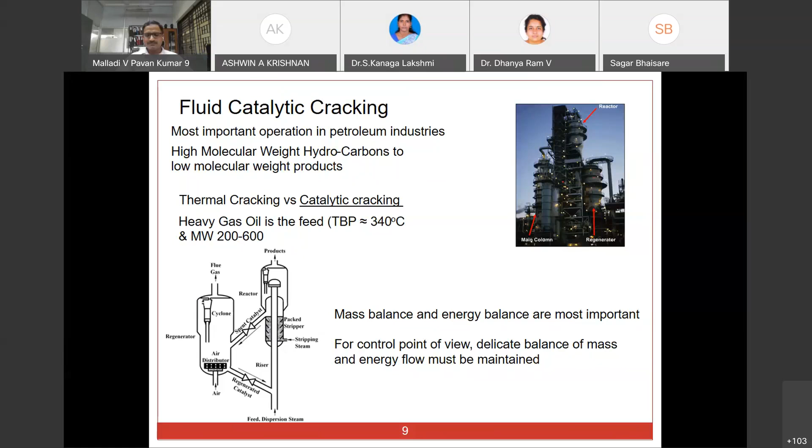Now in this slide, I am showing you a diagram of a fluid catalytic cracking unit. I hope everyone is able to see this. In the case of the catalytic cracking unit, at the bottom there is one arrow. From this arrow, raw oil, which is heavy, is pumped into the riser. The riser is a pipe - a vertical pipe.

In this pipe, the feed oil will mix with the catalyst. The catalyst, in the case of refineries, is zeolite catalyst - a powder type, powdery substance. So this oil and that powder are mixed, and in this riser the residence time for the oil is only 0.1 seconds - very little time, very high temperature. So from the riser, it will go into the reactor section.

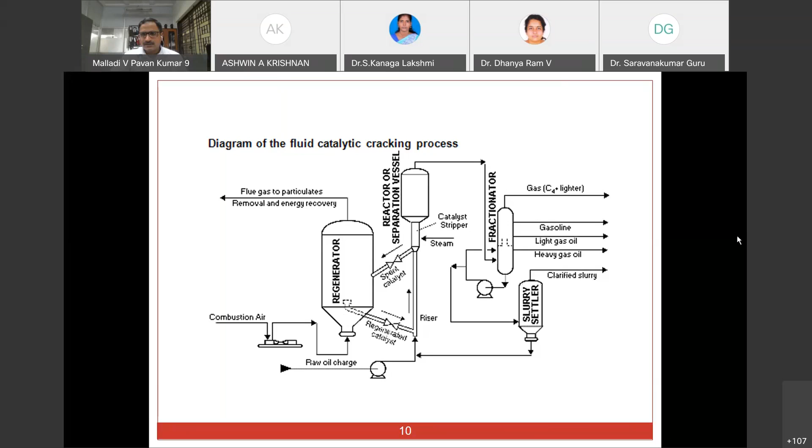Now, in the case of the reactor, we have to understand the cracking reactions. Cracking reactions are not simple enough to understand. In literature, they have proposed lumped kinetic models.

In the case of petroleum, do you know the formula of petroleum? You don't, because petroleum is a mixture of several hydrocarbons. There is no standard formula for kerosene, similarly for heavy gas oil there is no formula. They are only characterized in terms of the boiling point difference. That is why lumped models were developed.

In this slide, I am showing you a 7-lump model. In this lump model, you can see vacuum residue as lump 1, vacuum gas oil as lump 2, light FO (LFO), LPG, coke, dry gas, and gasoline. You can see the cracking reactions and their kinetic parameters, K14, K24, K34. Here, vacuum residue is directly converted to LPG - this is the associated kinetic parameter for that reaction.

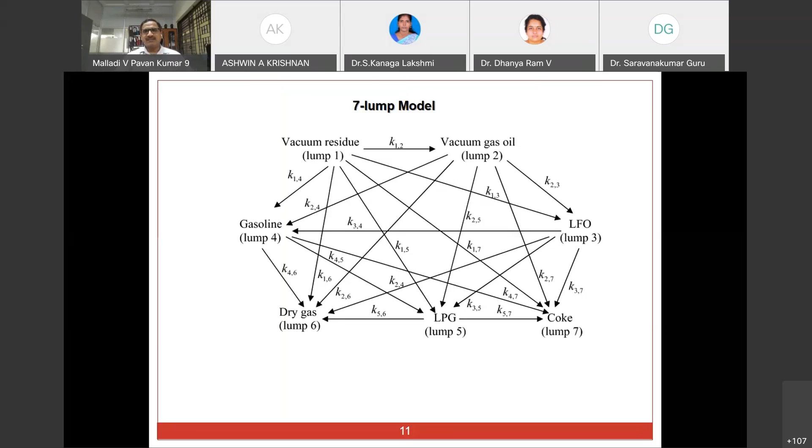FCC itself is a very complex unit. So in the case of FCC, many researchers attempted to do steady state simulation and dynamic simulation using lump models. They compare experimental values with predicted values from the simulation, and if there is a close match, they say this model is very useful, please use it. But every refinery is unique, because the feed also changes depending on the petroleum well it comes from. Some feeds contain impurities like sulfur. So there are many complexities involved in the dynamic and steady state simulation of an FCC unit.

Okay, now that is one thing. So whatever complexity is there, as academicians we have to simplify and give some predictions. We have to give some conclusions regarding the operability of the FCC unit and its control strategy. That is what we have done here in NIT Calicut. Now, steady state analysis.

Steady state analysis is nothing but the study of the input-output relationships. A control structure's performance can be analyzed under steady state conditions. But dynamic simulations are necessary to validate the steady state analysis results.

In earlier days, design and control were taken separately. Design first they will do, then after that they will try to devise control strategies. But nowadays, as the complexity of chemical processes increased because of challenges like environmental regulations, and because we want to invest less money and maximize the product, we are combining two or three functionalities into one single unit.

In earlier days we had computers that we used just to type. But after that their capability increased, and we were able to watch movies and do many things using computers. So many functionalities are there now. In the case of laptops, now tablets are there. Similarly, chemical processes also have seen big development, combining the functionalities of many unit operations. So the complexity has increased.

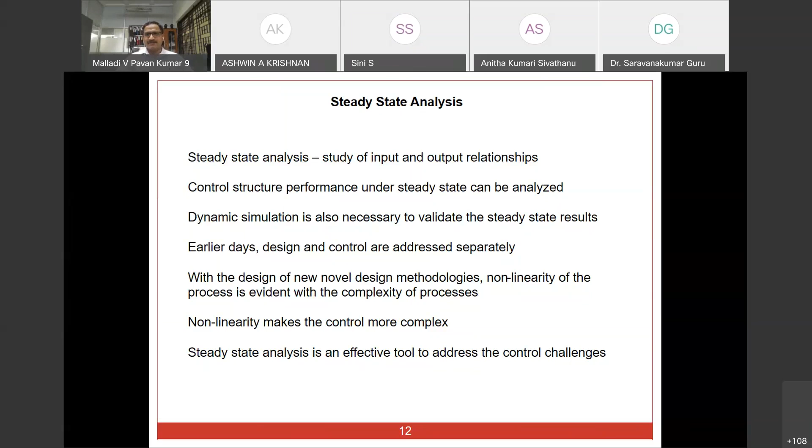But we have to do dynamic simulations to understand the workability of the control structure suggested by the steady state analysis. See, steady state analysis will tell us something like when we see a Hero Honda versus a Royal Enfield, we say, oh, the Royal Enfield can go to Delhi. That is only a prediction, like steady state analysis. The Hero Honda cannot go, right? But we have to actually take the vehicle to Delhi. Then only we can confirm that. So similarly, we have to do dynamic simulations to prove the suggestions given by the steady state analysis.

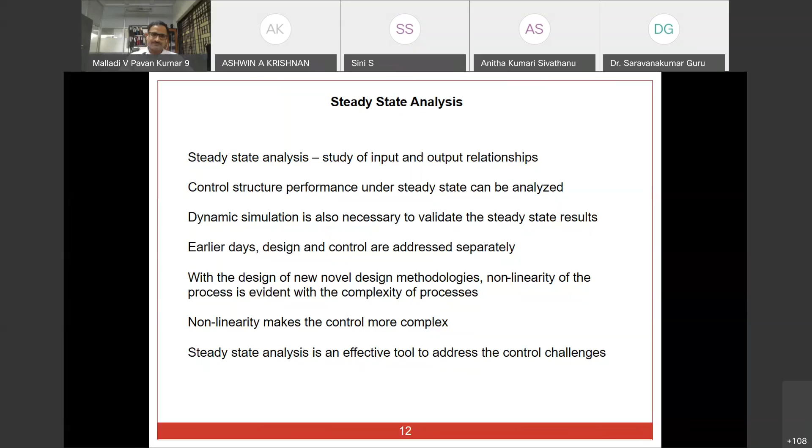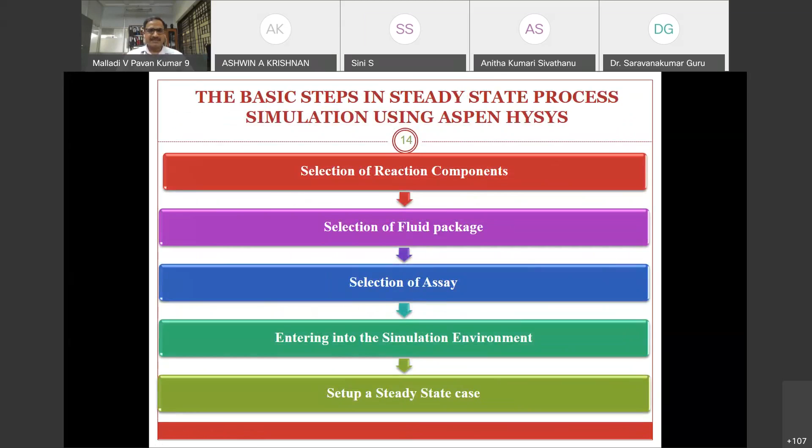Now, for the steady state simulation, we have selected the components, the fluid package, and the feed assay. So we enter into the simulation environment and set up a steady state case.

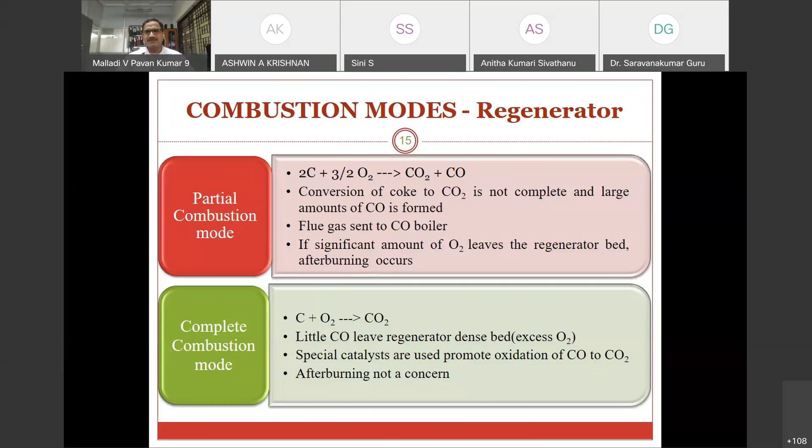So we have selected the package. These are the components of the reactions. Then we have to select a fluid package. So we have used the Peng-Robinson equation of state.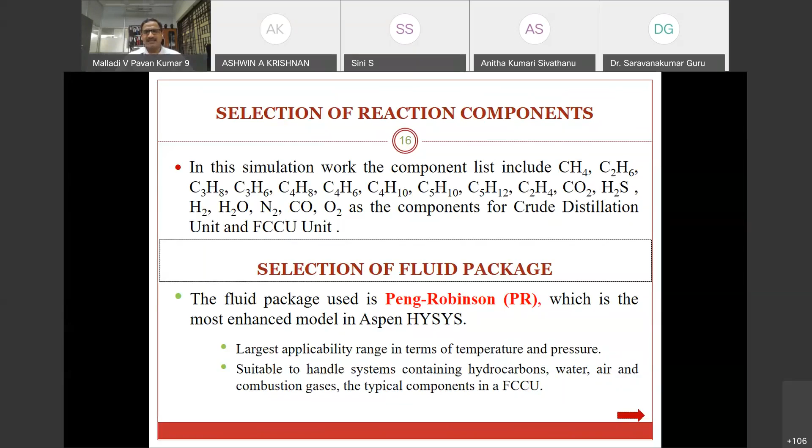What it will do in the simulation - density, molar volume, pressure, temperature - all these things depend on the package that we take. Peng-Robinson equation of state is an advanced equation of state that we have selected, very useful in handling all types of hydrocarbons, water, air, and all the typical components present in an FCC unit.

Now, these are the control structures. In the entire FCC unit, you might have seen the temperature of the regenerator and temperature of the cyclone. What is cyclone? In the case of cyclone, you separate the flue gases from the solid catalyst. In the regenerator, that is called the cyclone separator.

Cyclone separator temperature, regenerator temperature, and reactor temperature - these three are the important output variables.

Why are these taken as important output variables? Temperature is very easy to measure, whereas composition will take some time because of the lags associated with the equipments used for the estimation of composition.

Experimentally, now what are the potential input variables? Input variables are the catalyst circulation rate. You have seen catalyst is being circulated from regenerator to reactor, again reactor to regenerator, regenerator to reactor - like that it is circulating. So catalyst circulation rate is an important input variable.

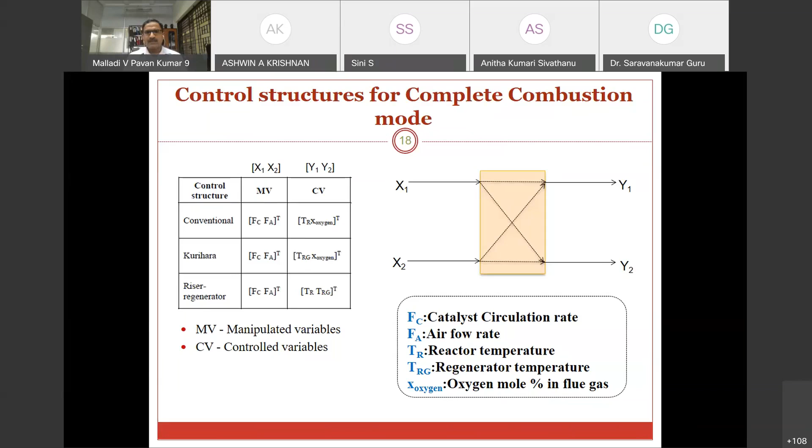So these are the base case values, like feed flow rate, feed temperature, feed pressure, specific gravity of the feed, and steam flow rate, for complete combustion mode and partial combustion mode. CC represents complete combustion mode and PC represents partial combustion mode. These are the hardware parameters and process parameters.

The mole fractions of CO, CO2 and oxygen, everything is given as far as flue gas is concerned. Here you can see the reactor temperature, reactor pressure, TR, TRG, delta TRG, all those things are given here. TCY, that is cyclone temperature, everything is given there for the steady state conditions.

For the steady state conditions, these values are taken from a journal paper published in 2001 in Chemical Engineering Science. This research was done in Korea. It was published in Chemical Engineering Science, volume 56, page number 1973. This is in 2001.

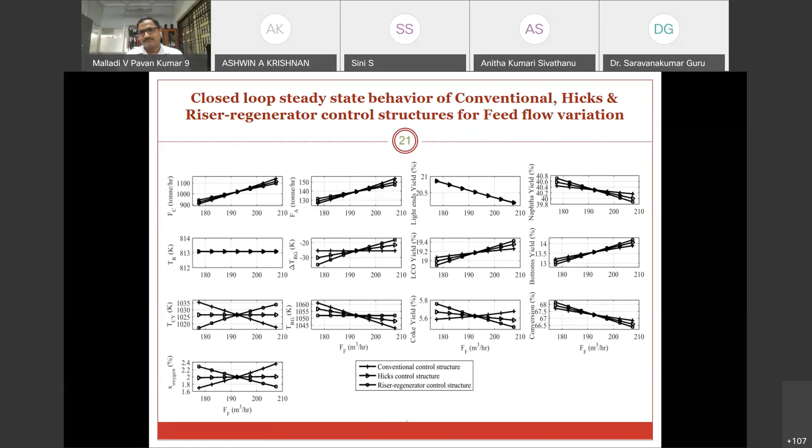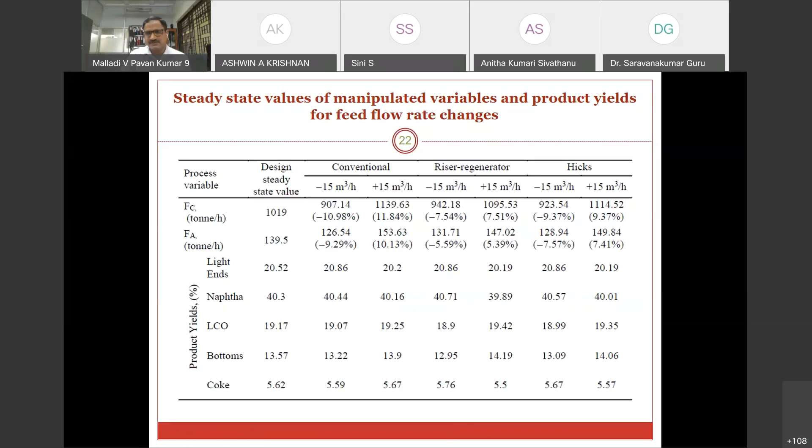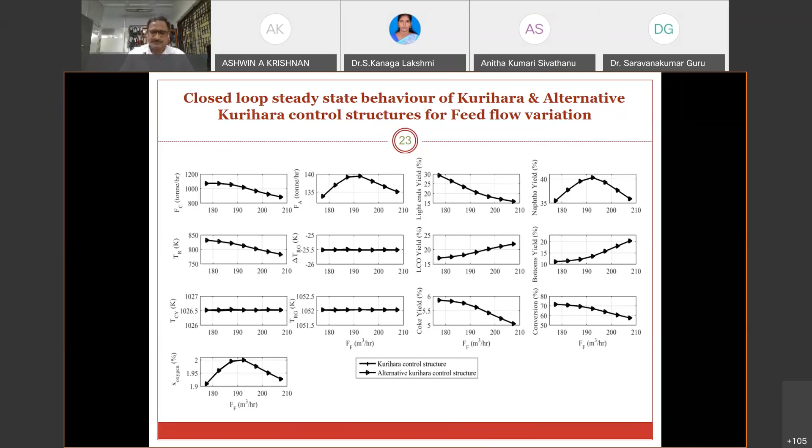Now if air blower discharge temperature is varied, that is also a potential disturbance. Under steady state conditions, we simulated the FCC unit for these disturbances for 5 control structures, then for 3 control structures, because we eliminated Kurihara and alternative Kurihara control structure since they are not efficient as far as feed flow rate variation is concerned. So we did not study them further.

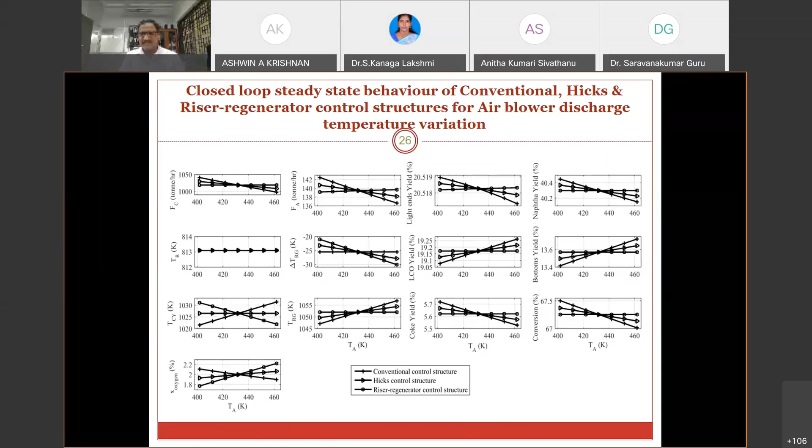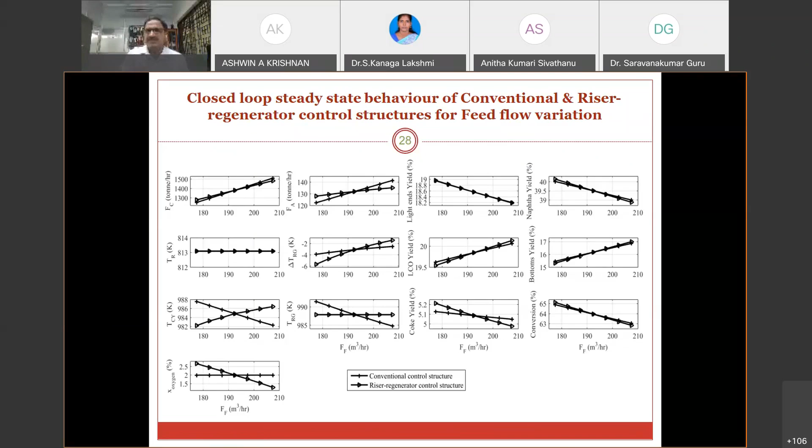Naphtha yield, we are inferring the temperature. This is called an inferential control scheme, where we are interested in naphtha yield, but we can't control naphtha yield directly because it is very difficult to control. You can control only the temperature. Temperature is being controlled, and we will see how naphtha yield is being varied.

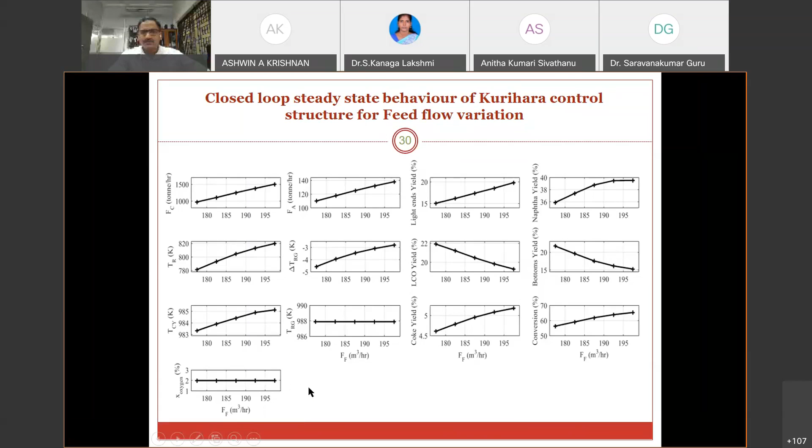Come to the Kurihara structure. This is Kurihara control structure. In this case, what happened is we could simulate the column up to the design steady state, that is 195. We could simulate the column only in the direction of decreasing the feed flow rate. We could not simulate the column for increase of feed flow rate above the design steady state. We could not simulate, and then we saw why it is so.

Because when we increased the feed flow rate to 202.55 meter cube per hour, what happened is 987.9 Kelvin is the regenerator temperature at the design steady state. We could not achieve 987.9 degrees Kelvin in the regenerator with respect to the catalyst flow rate variation. We could not reach this; it is going like this under steady state conditions.

If we seek this set point, dynamic simulations, what is going to happen? See, FC cannot... under dynamics, the failure of this control structure you can see, because you are seeking an infeasible set point value when you take the feed flow rate to 202.5 meter cube per hour. Our base case is 192.5. If you seek this, then you will not reach the regenerator temperature set at the base.

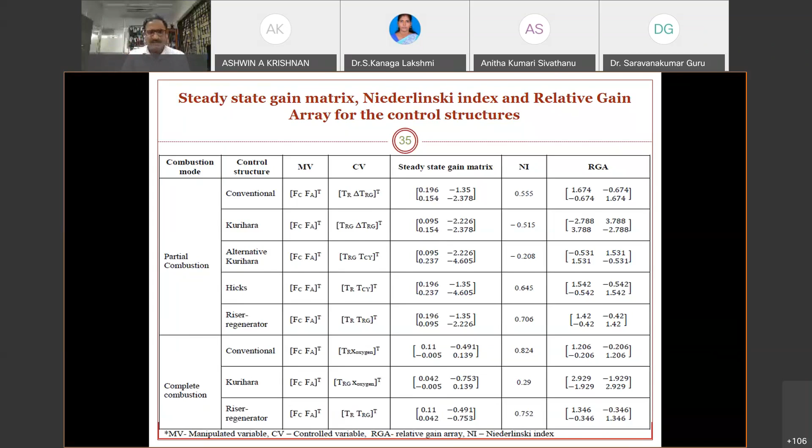So for all control structures, we have taken the steady state gain matrix, Niederlinski index and relative gain array. So these are the conclusions.

We have taken closed loop steady state performances of 2x2 regulatory control structures for a side-by-side FCC unit under 2 operation modes. 3 types of disturbances are selected. In the control structures where the catalyst flow rate is used to control the temperature of the reactor, we got favorable closed loop steady state performance.

Successful regulation of conversion is seen as key for the preservation of the product yields. Best workable control structures are identified for both operation modes. For these 2 modes, in the control structures where...

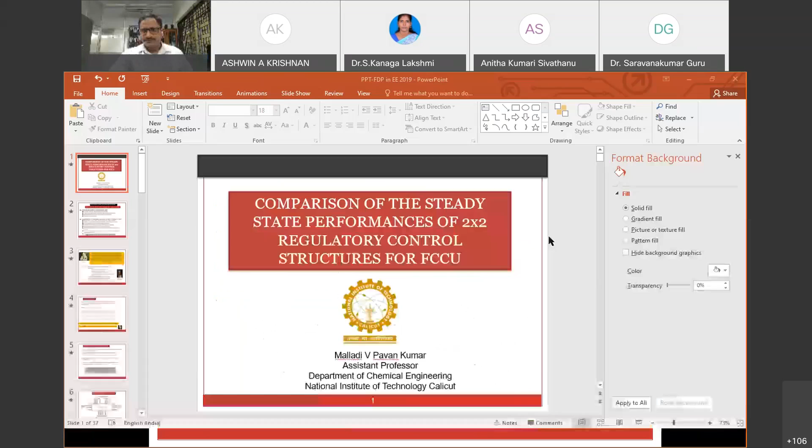Sir, there are a few questions in the chat box. Shall I read them out? The first question is from Mr. Manitija: why can we not have flow rate of oil as a manipulated variable to control regenerator temperature? We can have that also, but we have to test it.

See, these concepts are given in the literature. We have taken them directly. As you said, we can take that, but that type of pairing is not favorable because we have to use flow rate of oil as our regulation handle to regulate the production of the plant. That is why that choice is not good.

That is why these 5 structures. Yes, okay, next question. The next question is from Mr. Gopinath: for liquid, mass and energy is taken for balancing. What to take for natural gas for processing balance?